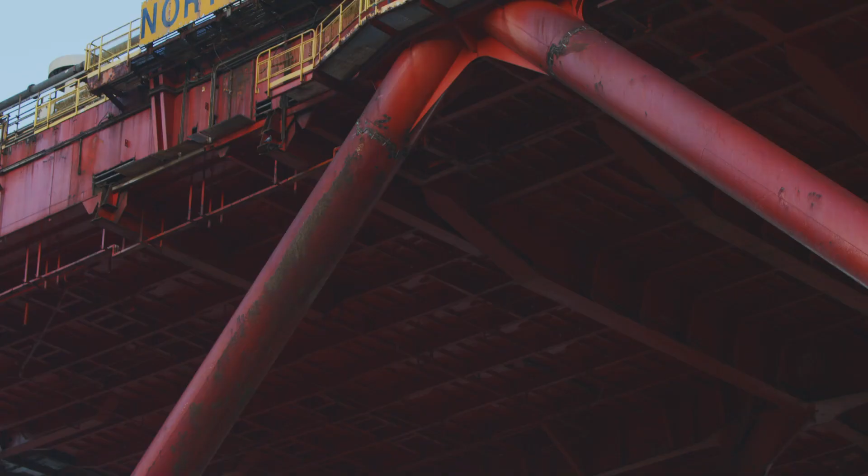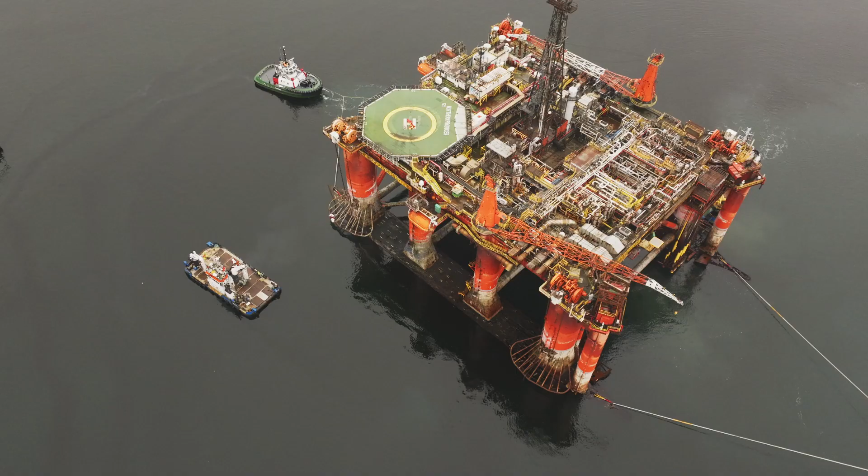Liberty Industrial was engaged by Qualamar Shipping Limited, Northern Offshore UK Limited, for the decontamination, demolition and disposal of the Northern Producer floating production platform. Constructed in Norway in 1976, the Northern Producer operated for over 40 years as an oil drilling rig in the North Sea and floating production facility before being decommissioned in 2021 and relocated to Kishorn, Scotland in 2023 for decommissioning.

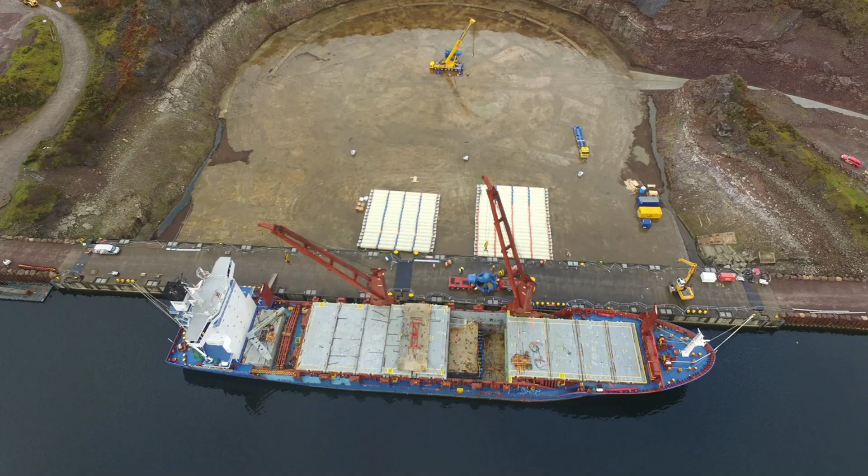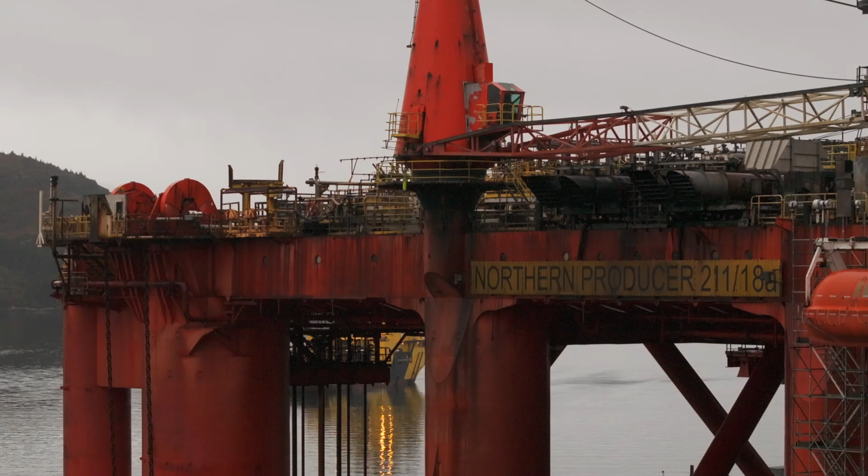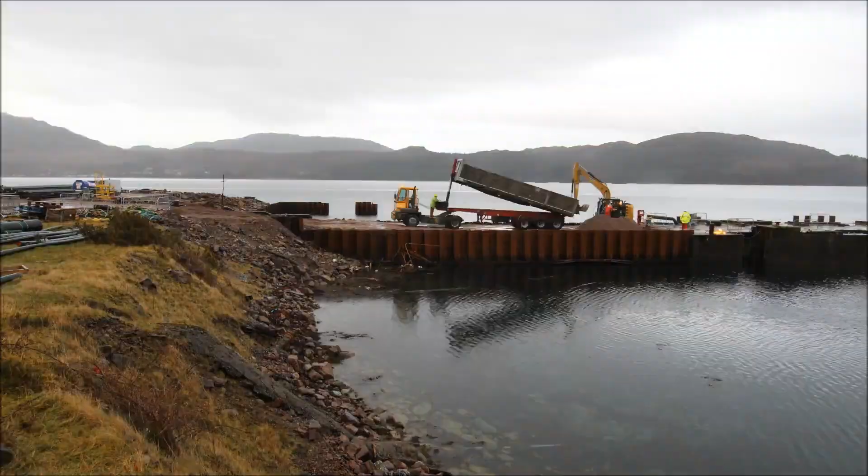The platform, weighing in at 11,200 tonnes, was transported via floating techniques, utilising multiple port tugboats and experienced crew to carefully position the vessel in the precise location for the future blasting event. Once in the dry dock, the gates were floated back into position and sealed to enable the dock to be pumped and drained free of its 250,000 cubic metres of water over a period of 2.5 days. As the water level decreased, the vessel slowly lowered to come to rest on the dock slab.

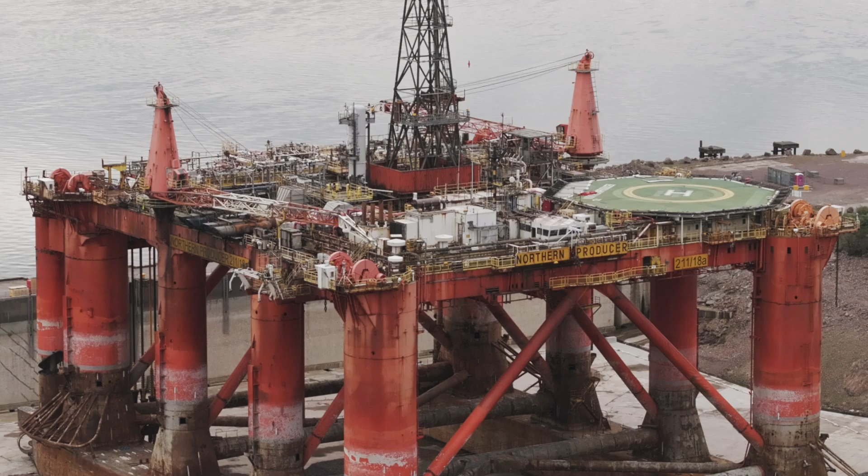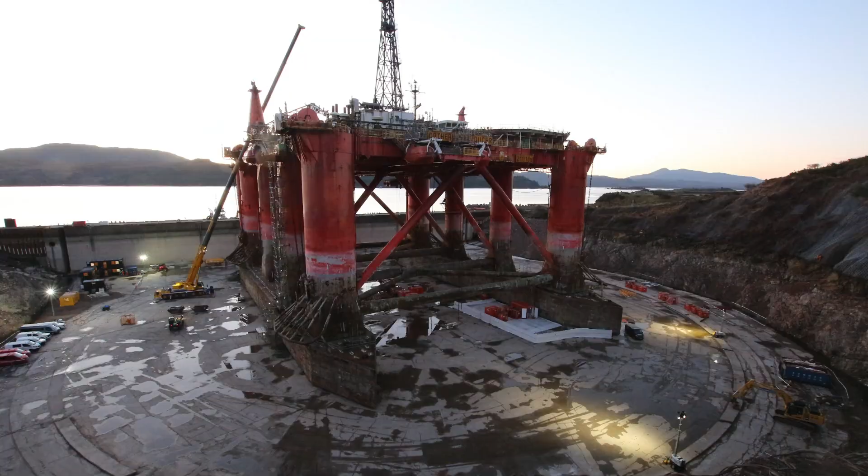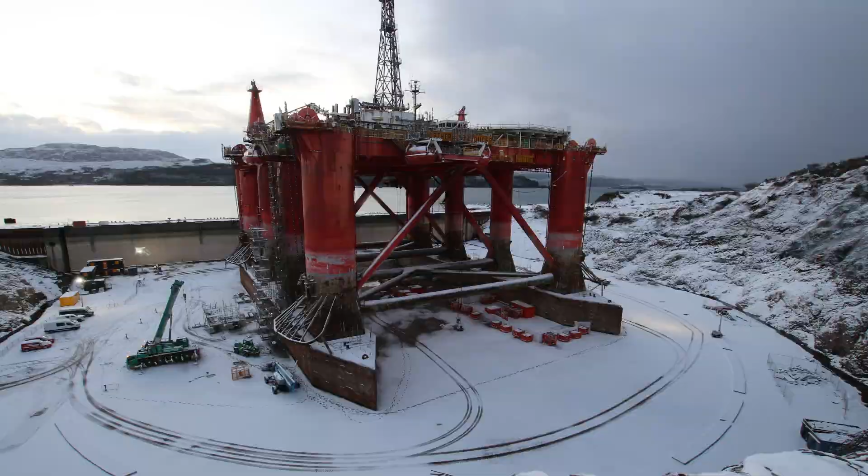The Liberty Industrial team commenced removal activities of the internal furnishings and completed removal of asbestos-contaminated materials and vessel fuels. Additionally, in parallel with this, a team of expert contractors commenced the de-energisation of some live electrical and service systems and the removal of NORM-contaminated materials from the process systems. Towards the end of this process, some reusable plant and equipment were identified, dismantled and recovered, including 5 Solar turbine generators and gearboxes, and valuable electrical instrument control items. These were all sold to others for refurbishment and reuse, along with the vessel's 4 lifeboats.

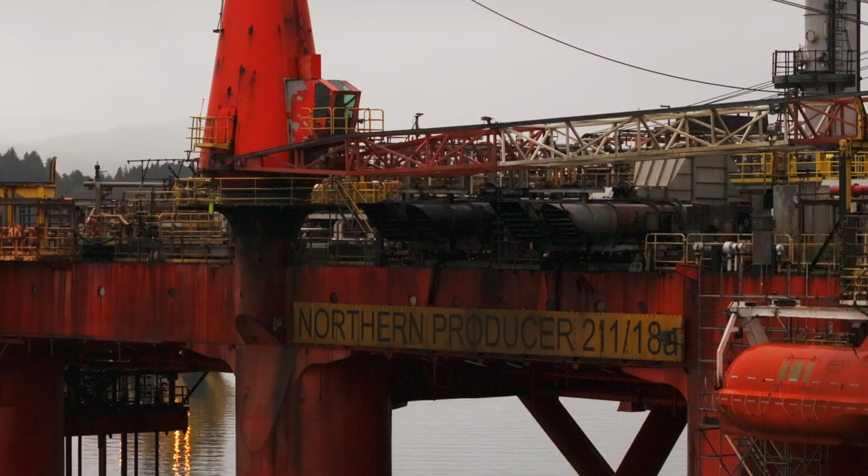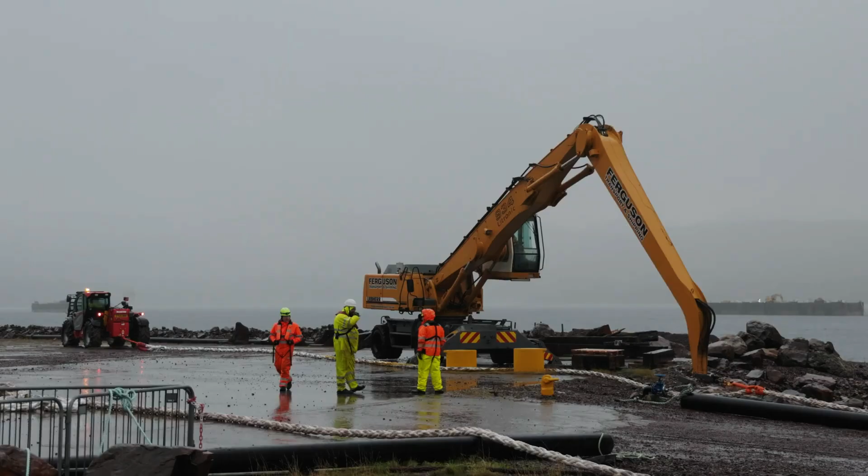To complete these tasks and activities on top of the unpowered 35-metre-high platform, a combination of labour was used with a materials hoist and 150-tonne cranes, mobilised as required throughout the 7-month process. In total, more than 650 tonnes of hazardous material and equipment were removed from the platform prior to the explosive blowdown event.

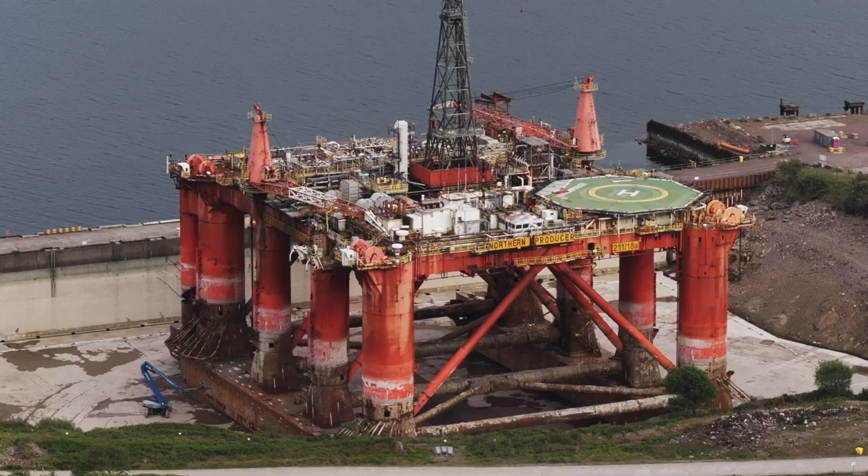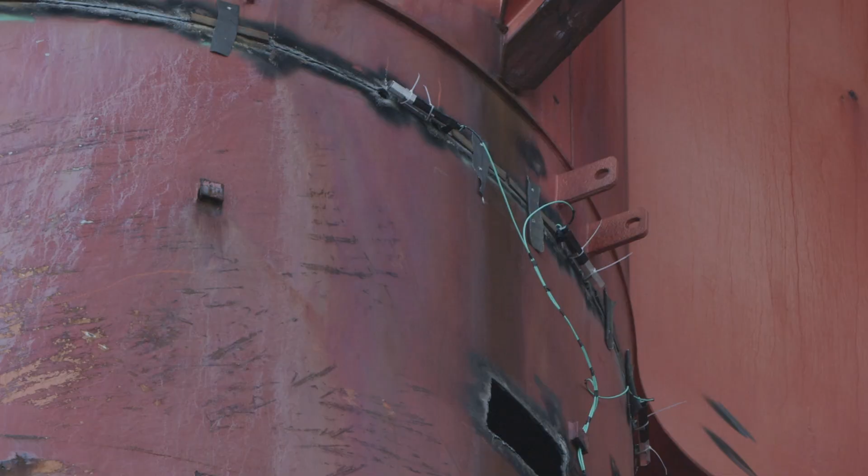In order to bring the platform's topside to ground level as quickly and safely as possible, Liberty Industrial completed engineering reviews that confirmed the feasibility of the use of explosives and structural pre-weakening cuts, while preserving the integrity of the dry dock's floor and walls. Liberty Industrial's management team engaged and collaborated extensively with PDC and ASI to generate accurate animations on the mode of collapse and derived a demolition design that precisely controlled the direction of fall, while minimising work on site.

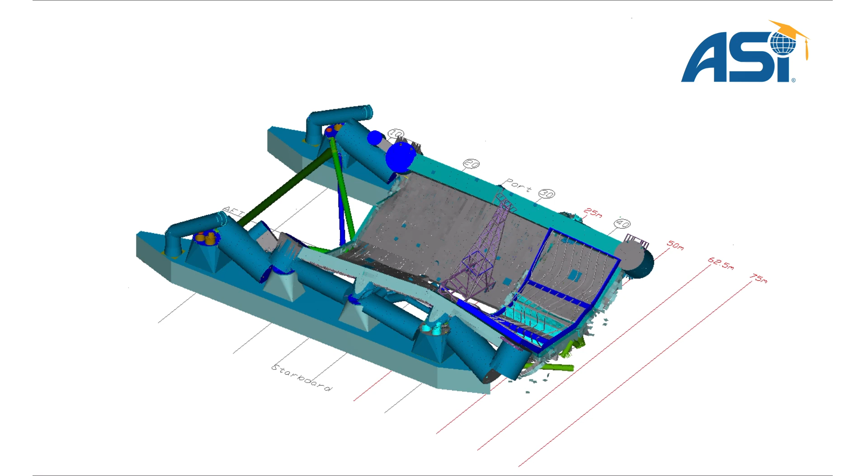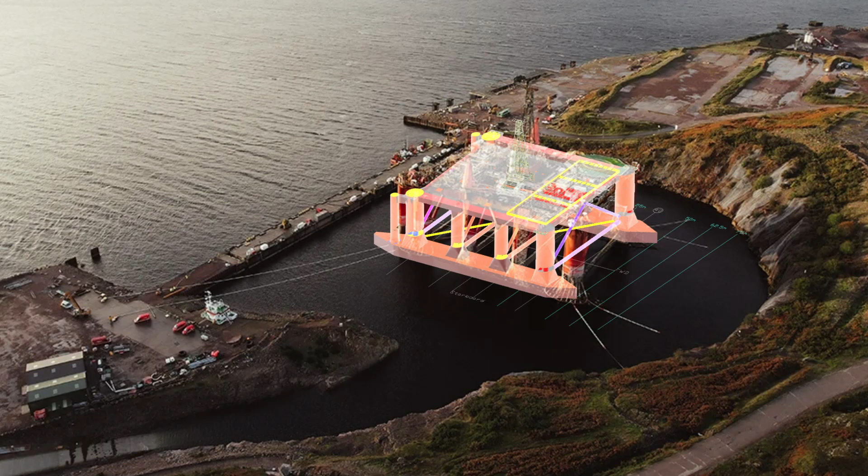This design was realised by pre-weakening from the inside of the columns, cuts to the top and bottom of 8 key structural columns, and external cuts to a further 22 structural members, allowing the structure to fall without rotating in the direction of the bow and away from the dry dock wall. Internal cuts were completed without incident, with confined space rescue teams in place throughout the entire process.

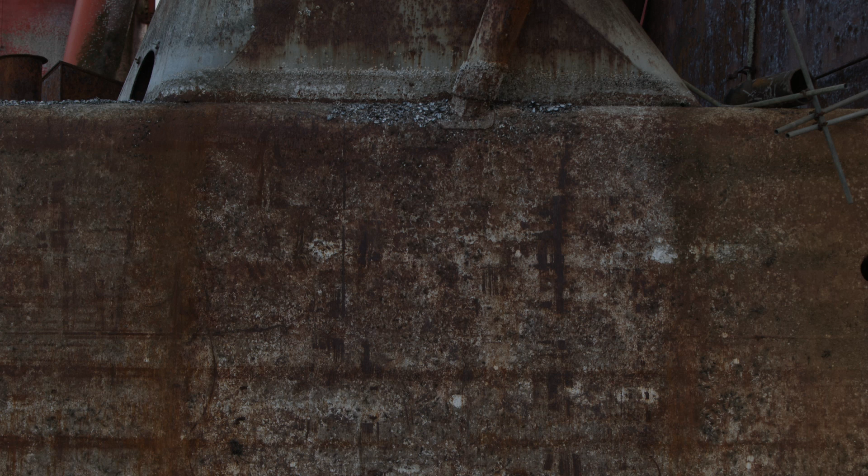The design included the provision of over 4,500 tonnes of crushed rock to act as an impact cushion at the predicted dry dock floor touchpoints. This rock was procured from the neighbouring quarry. Finally, the structural design recommended a 600-metre exclusion zone, which was patrolled using sentries and a local roads traffic management subcontractor.

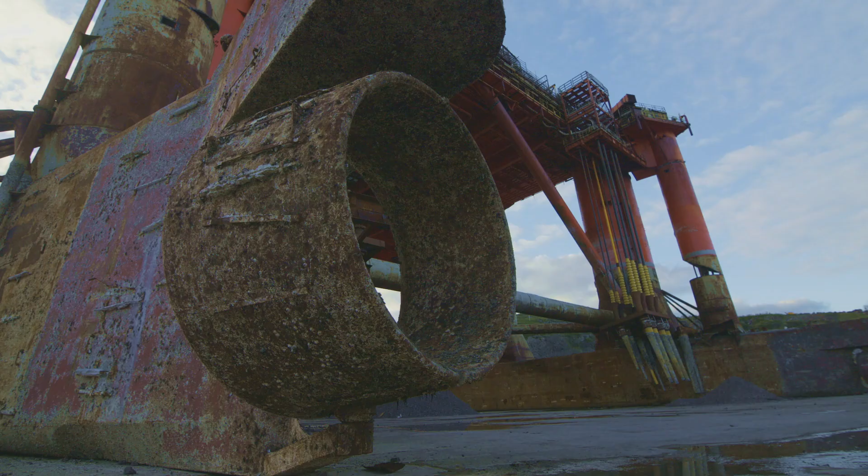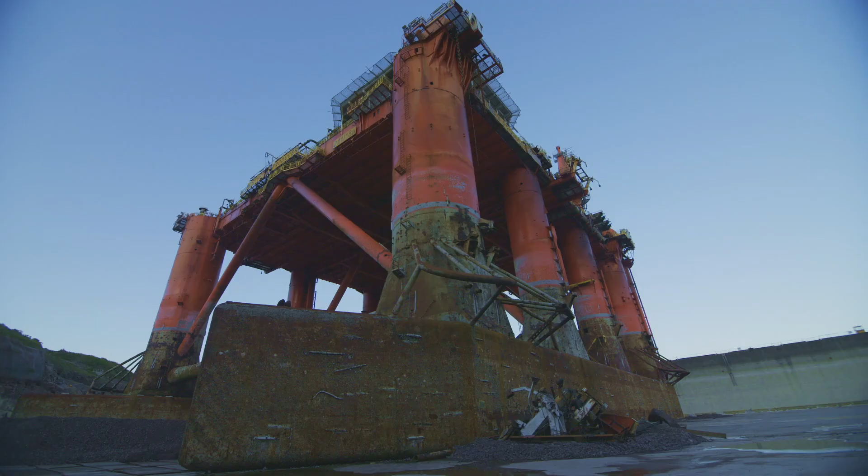As the pre-weakening activities progressed, torsional and misalignment challenges unfolded. Over 300 kilograms of explosives and over 300 cutting charges were strategically placed at these 38 cut locations, to make this blowdown one of the largest single-use of explosive events at a demolition site in Europe at the time of the project. After months of material removal and project planning, it was time for the Northern Producer to come crashing down, and it did, in spectacular style.

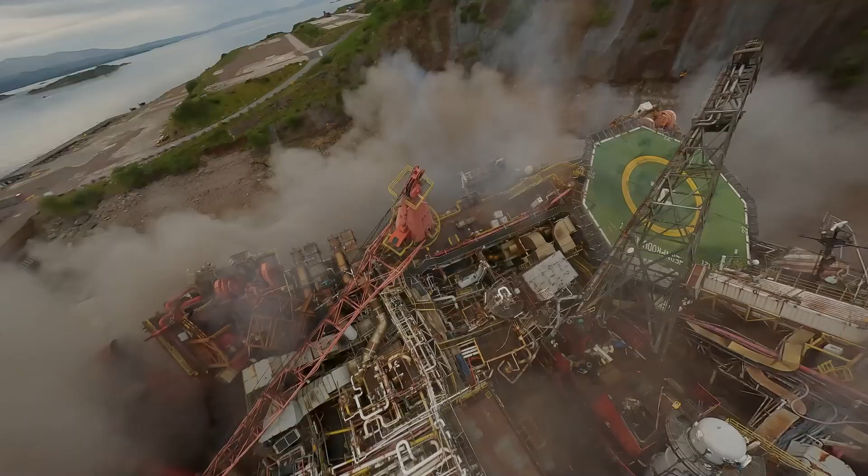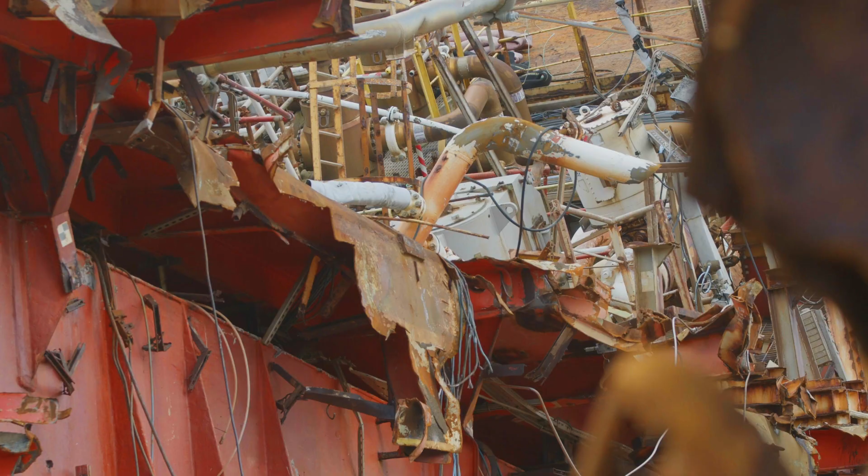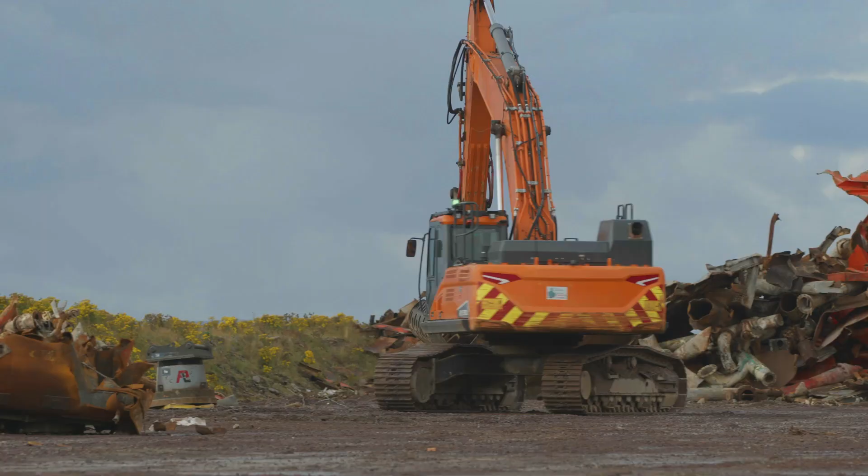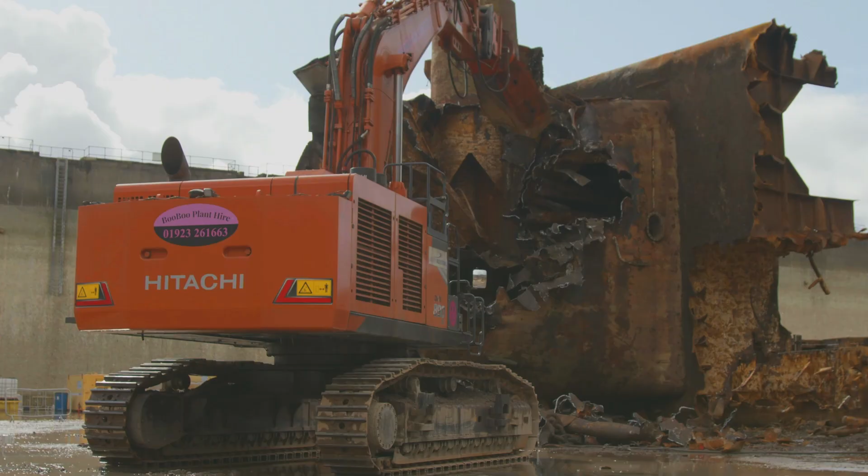Following the successful blowdown of the 11,200-tonne structure, the Liberty Industrial team got to work on downsizing and further recycling. 95, 85, 70 and 55-ton excavators with shears, grabs, magnets and material handlers were mobilised, with the two larger machines having to be shipped in using barges, given local road limitations for moving machinery of this size.

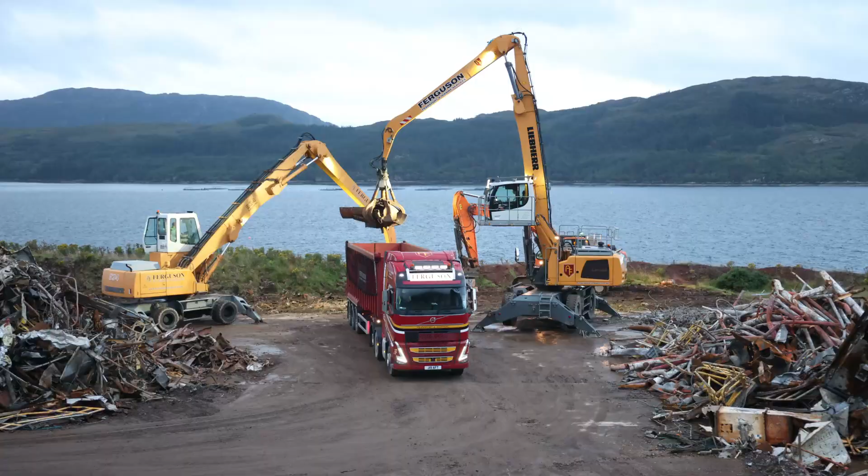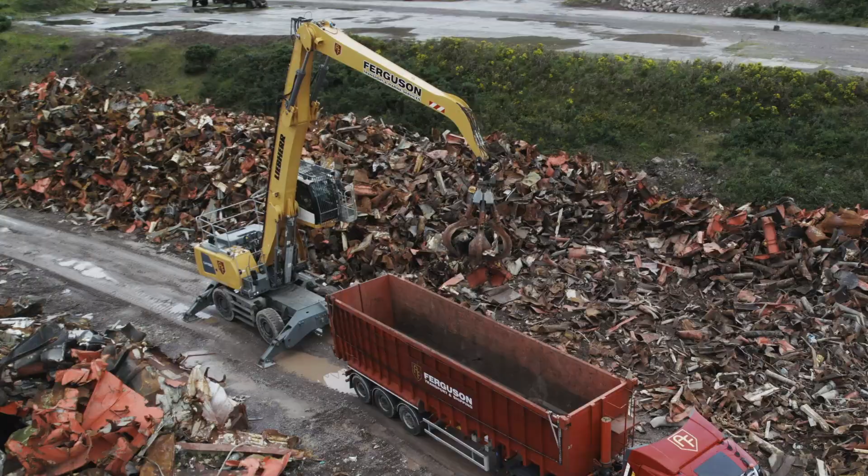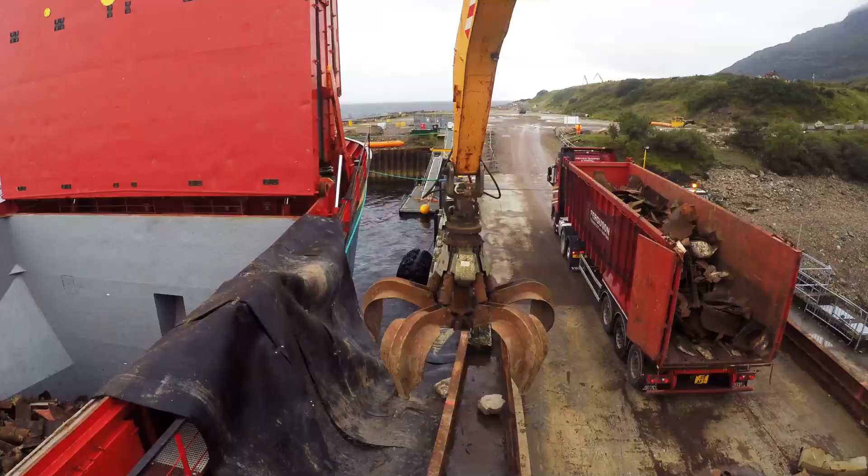The recycling program aimed to promote an environment-first solution, minimum landfill with maximum recycling. Given the diversity and components of the asset, the innovative approach included leveraging several local and international entities and local community engagement. This project incorporated a circular economy focus with the aim to recirculate materials back into the supply chain.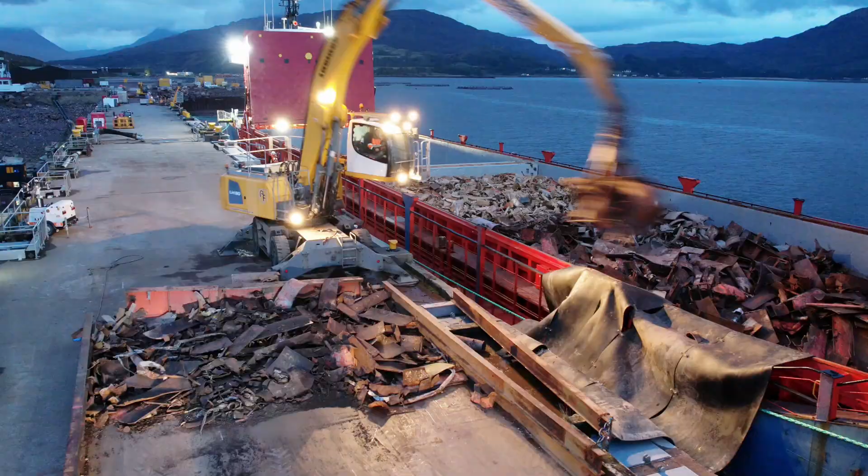This saw, with Scottish Environment Protection Agency's approval, the repurpose and reuse of many items, including 42 tonnes of marine growth sent for recycling as fertiliser for local farms, and operational memorabilia, which was collected and sent to museums for historical preservation. All in all, Liberty Industrial's recycling efforts achieved an impressive 98% rate for recycling and material reuse.

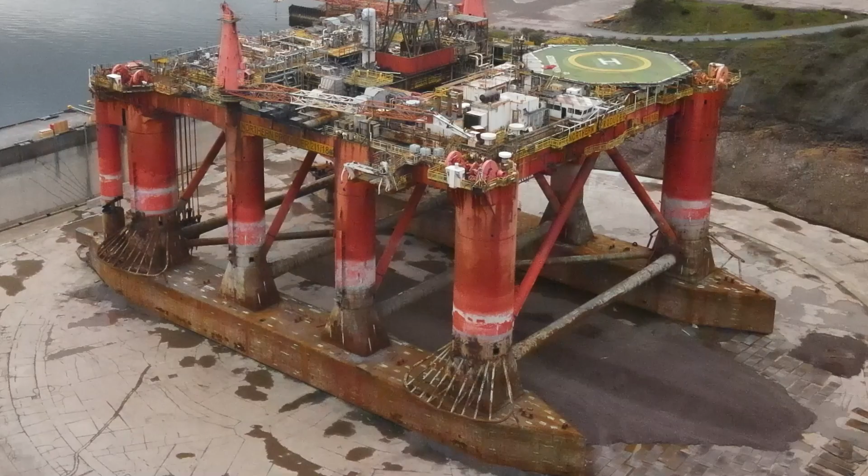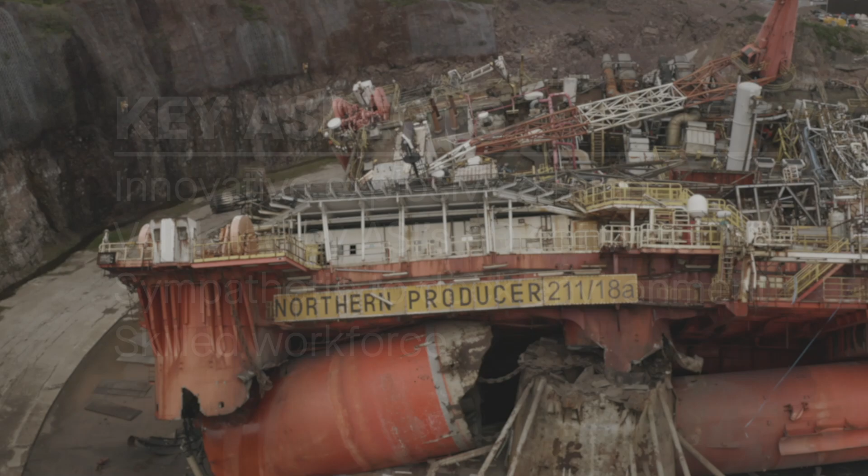The Northern Producer Decommissioning project, the second only awarded to Liberty Industrial in the UK, successfully executed the blowdown on June 13, 2024. The unique project completed a blowdown that featured an innovative and explosive design that evolved to meet site challenges, all validated with ASI's 3D modelling Extreme Loading software, sympathetic to the dry dock environment, and with a skilled workforce pre-weakening and installing an elaborate web of explosives that was executed and fell as predicted without incident.

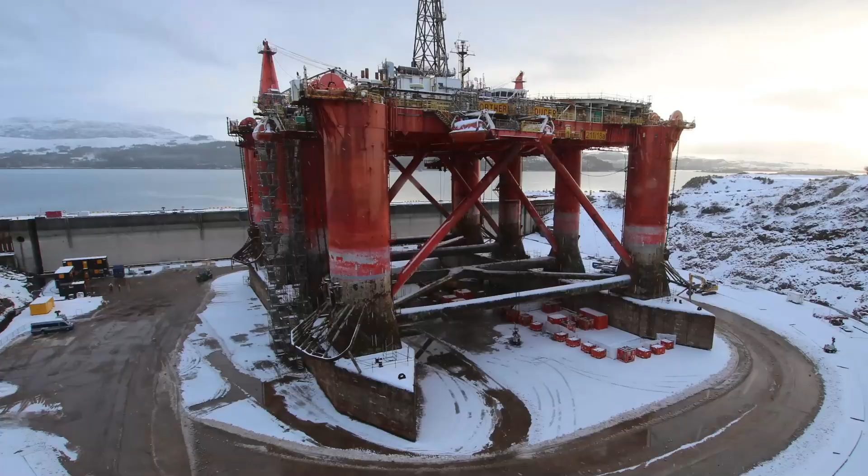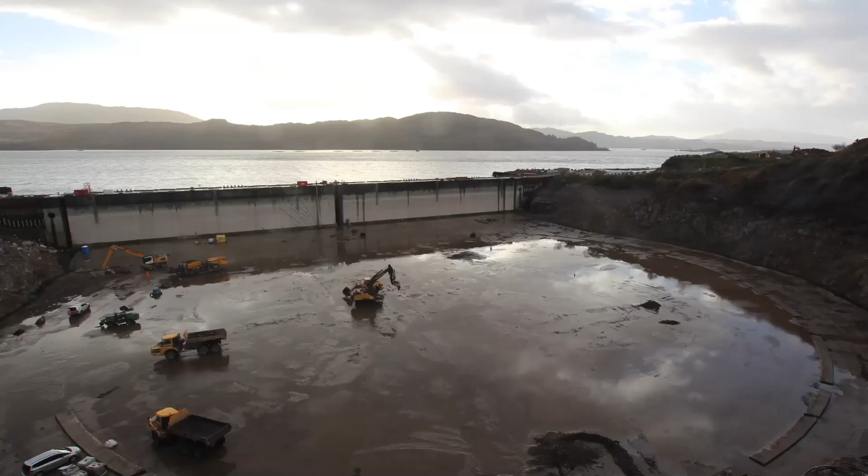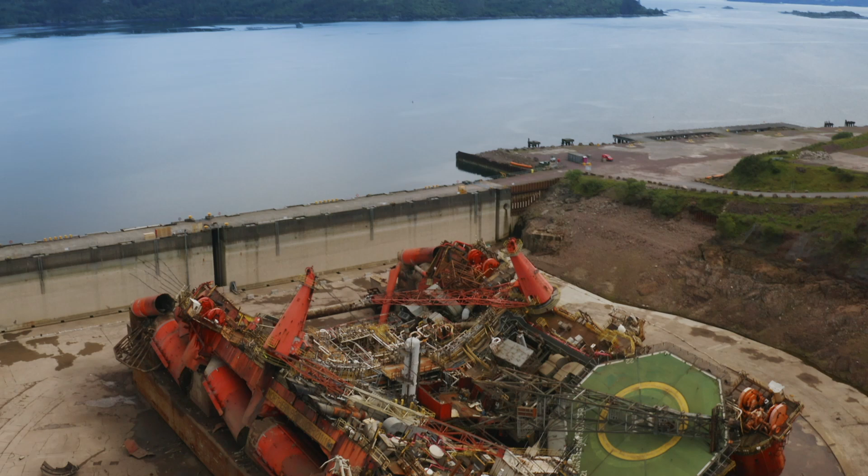The project was completed without any health, safety and environmental recordable incidents and in line with stakeholder expectations. Liberty Industrial has again delivered innovative approaches in yet another first of its kind. This project, the first major decommissioning project in this remote location, exemplifies our values and showcases Liberty Industrial's dedication to decommissioning leadership for the oil and gas industry.